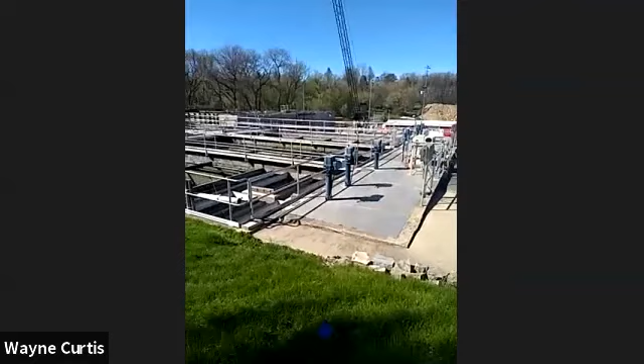What I wanted to do is, let me see, I need to make sure I know how to switch back and forth. I'm actually on site at the Penn State wastewater treatment plant. For those of you that have never been here before, I got permission today, thanks to John, I was saying Joe Swiderski. Wanted to thank them.

Note that today is Earth Day, and so I usually like to talk about global cycles. We touched a little bit on biofuels last time; really the focus there tends to be on carbon. Of course, the emphasis is not only on the fuel itself, but also on global warming as well. There are some issues that are not as popularized that have to do with other cycles, and nitrogen and phosphorus are two of them.

I do know that there's certainly a lot of you that may be motivated, or hoping, to go into saving the world through pharmaceuticals and so forth, and certainly the COVID circumstance has made that more prevalent. But one of the things people don't appreciate is the whole reason why we have the opportunity to be afraid of COVID is largely because advances in wastewater treatment have actually saved far more lives than the entire pharmaceutical industry combined.

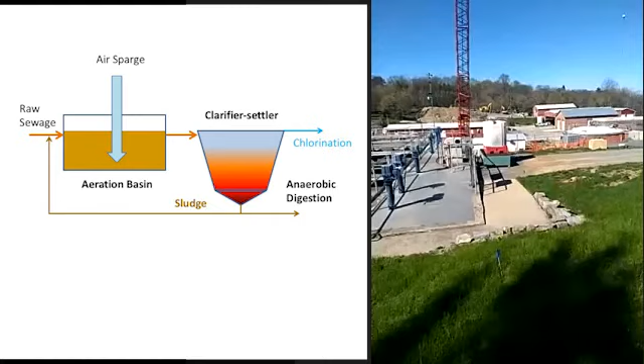So let me go ahead and switch the camera here. Let me start out by pointing out, as we head into the primary aeration basins, that this facility is designed for about 3 million gallons of water a day. Right now it's running at about 500,000. Million sounds like a lot, and it is. So the process has to be very well designed to control two different retention times. You want the solids to stay behind, and the water to run through as quick as you can and get clean.

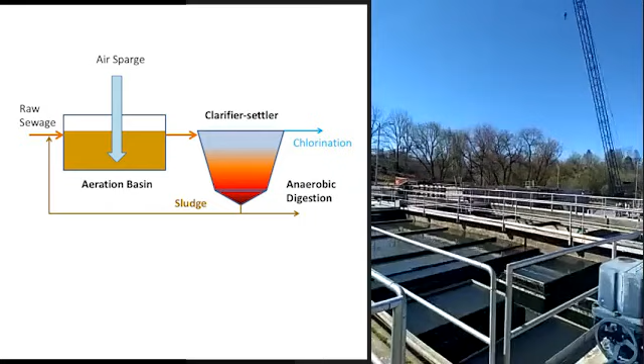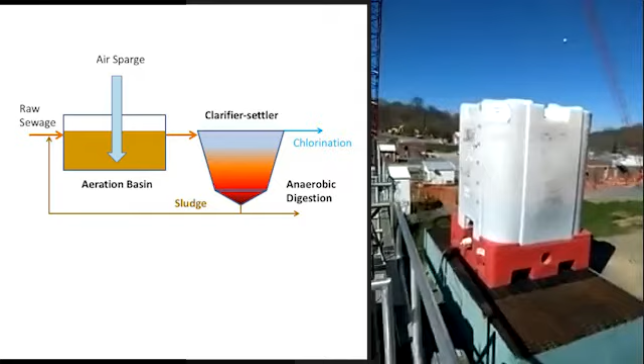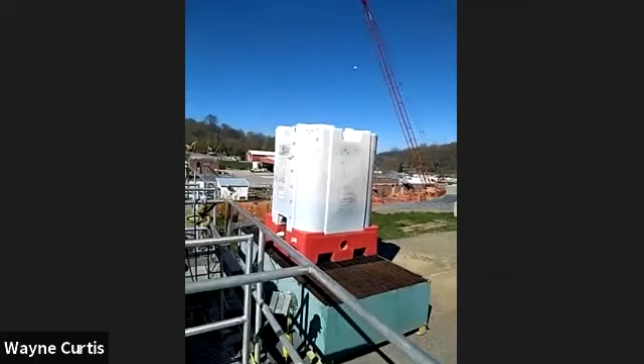Because there's not enough biological oxygen demand, or poop, they're actually feeding it. They're spending a lot of money right now buying carbon. This is called MicroC, which is basically an alcohol-based system. So they're feeding energy into this system to keep the microorganisms alive, because if you don't have the microorganisms alive, you'll lose control of the process.

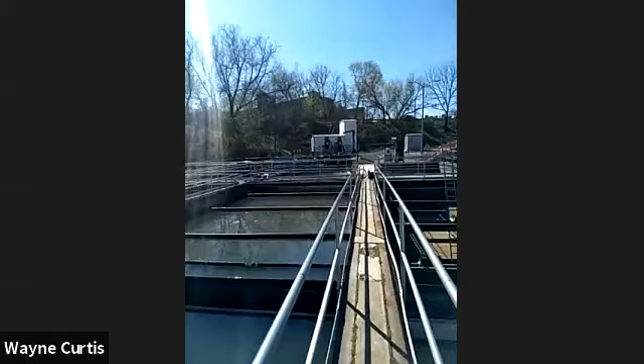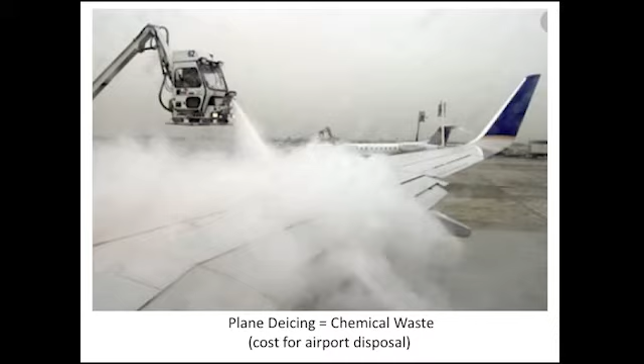Ironically, because the cost of this is now quite high, they just figured out that they could get the waste from the airport, because they use alcohol-based de-icing, and that alcohol de-icing is actually a waste product they pay to get rid of. And so now the university waste system is picking that up for free, and now they don't have to do that. And they're literally feeding it into the tank to keep the organisms alive.

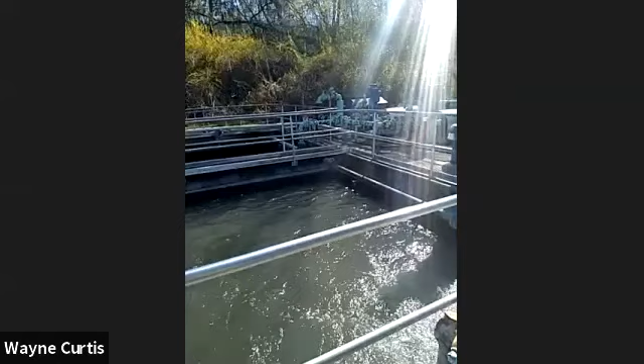Now you can imagine at the front end of a wastewater treatment plant, up there you have to get out the bits and the pieces and the grit and so forth, and that's what the filters are. And this is just a primary aeration tank. Now, because there's such a low BOD, they're holding steady, shall we say. They're minimizing the amount of feed into the system and just keeping things running, and a lot of the things aren't actually running here.

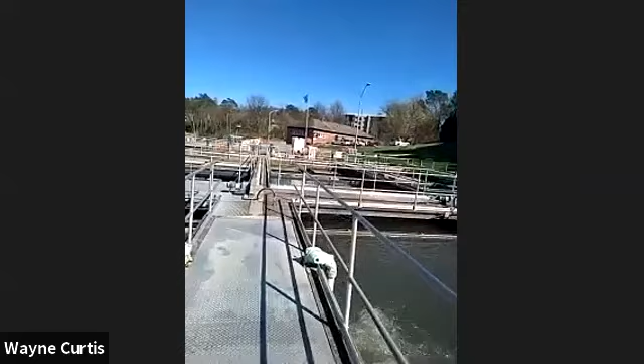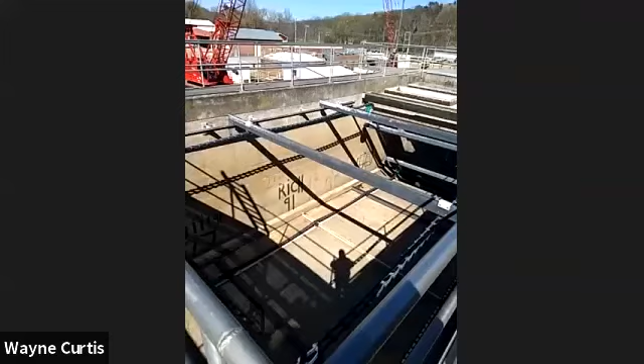When you go from this primary aeration tank, you go to a secondary one over here, which is full. It's kind of a neat opportunity here because the others are empty. And this is a settling tank. And the whole goal here is to settle things out. If you look down inside this area here, these are pretty deep, and as it settles to the bottom, you see these big chains, and they're just dragging the sludge down into the pits over here and getting the solids out of the system.

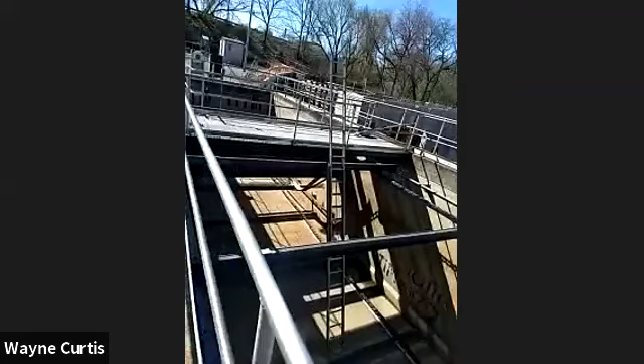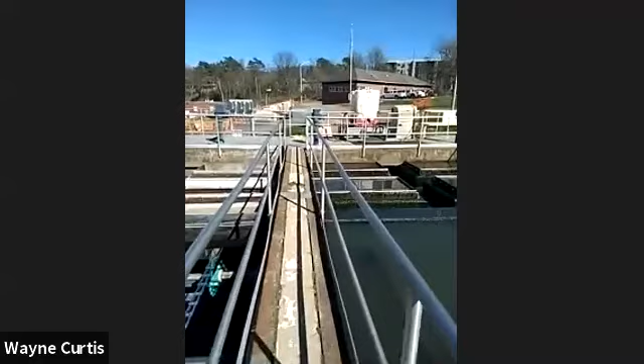So this efficient system, called the activated sludge process, was actually developed in the early 1900s, when they made the observation that by throwing a lot of aeration into a primary tank and then recirculating that, they thought they were activating the sludge, kind of like you do activated charcoal. They didn't know what the process was, and it turns out it's really facilitating very rapid growth and collection of the bacteria with a bunch of protozoa, eukaryotic critters that flocculate and stick together, and that gets them very activated for consuming the carbon and so forth that's coming into the system.

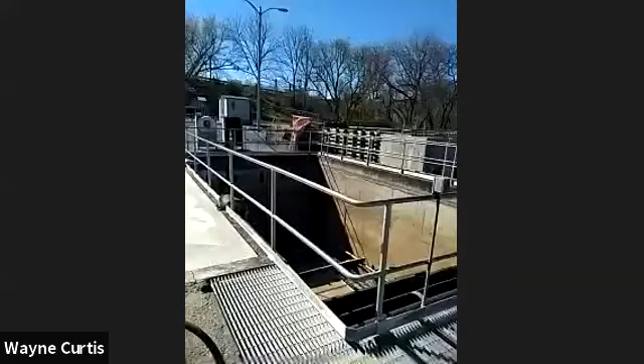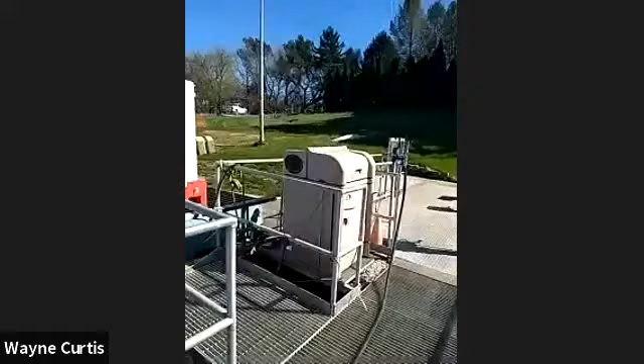And so by having a highly activated recycle, a recycle-based stream, what you end up with is organisms that are raring to go and also easily settle, because you're always trying to get the water separated from the solids.

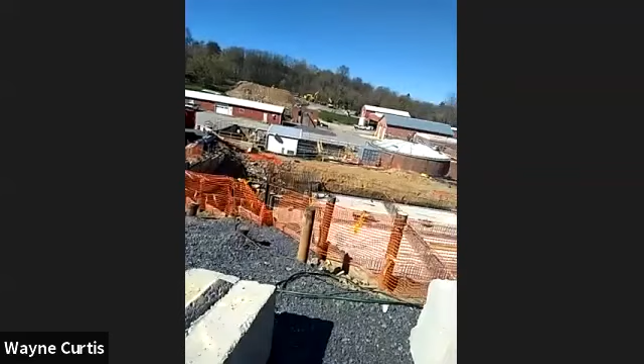So there's construction right now, because they want to make it a little more self-contained, a little less using the materials that came from the university and the surrounding community, and so they're separated now. So the university is planning to handle, shall we say, its own poop and not the community's, and that gives them a little more control, except on, say, football games.

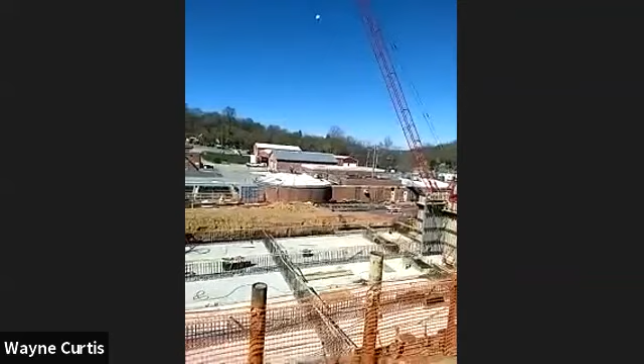So that primary tank here, now just to take a global look at what's going on, the sludge heads down to the tanks you see down here, and those are anaerobic. You see they have sealed tops on them, so those are biogas generators. Within those tanks, you take that sludge, undergoing very inefficient respiration, if you will, so that you retain a lot of the energy, and the waste product of the electrons is methane. You're basically taking the carbon, sticking 4 hydrogens on it, creating methane, and then it phase separates. And so that's an anaerobic digester.

So from here, aerobic, the process goes down to the tanks down here, where you have aeration basins, and those aeration basins are trying to oxidize everything they can. So if we now think about the big electron balance, we'll call it the world and so forth, the sun is here, and the sun has a lot of energy to shake loose electrons. We talked a lot about that, and grow plants, and that helps them to reduce carbon.

But plants have that fundamental difficulty in getting the nitrogen from the air, and that's because the enzymes associated with that are inhibited by oxygen. As a result, an awful lot of this process of biological control is based on controlling oxygen levels. We'll talk about that a little more down in the aeration tank, and then there are other tanks over there that are the anoxic tanks. But controlling the electron flow that happens in these things is all about that.

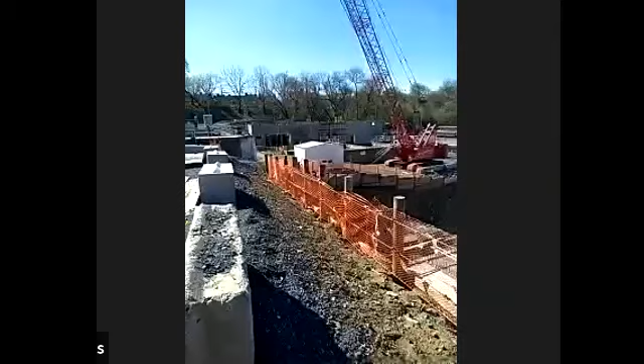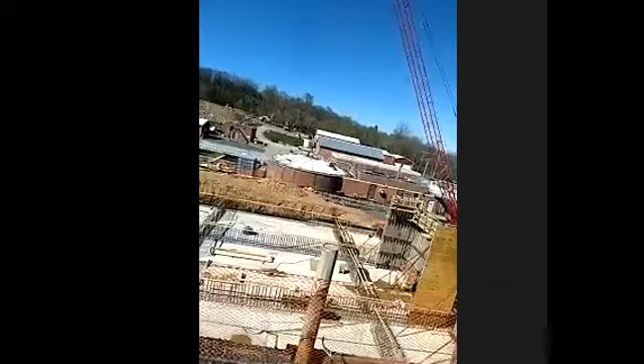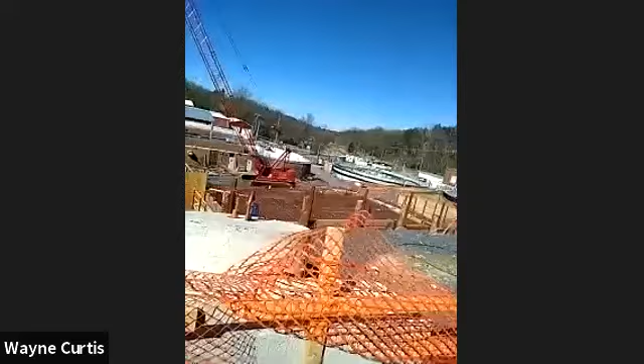This was a very complicated wastewater treatment plant, and the construction that you see here is actually new technologies they're putting in for removal of phosphorus. These will be tanks in here designed to be at a certain aeration and redox to allow for organisms to capture the phosphorus. And on the backside, over in here, is where they're going to have membrane filtration. So they're going to go to a membrane-based technology for the final purification.

Somewhat ironically, this wastewater treatment plant, unlike most, doesn't have a restriction on the effluent associated with phosphorus. The reason is that the effluent from this is actually pumped several miles up to the Toftrees area, where they spray it out onto fields, and even in wooded areas there. Since that phosphorus is basically going into a giant biological filter and not into the local streams, they don't have a restriction on the phosphorus. But nonetheless, they are developing the technology for the removal here as well.

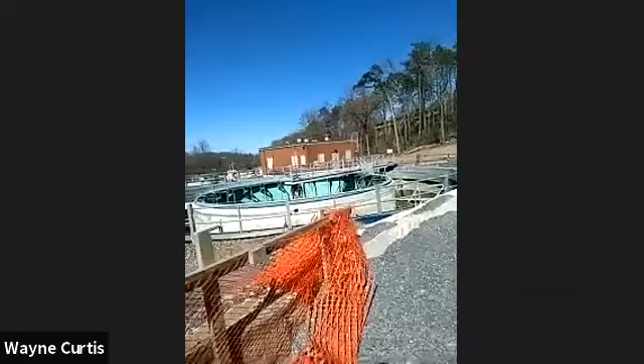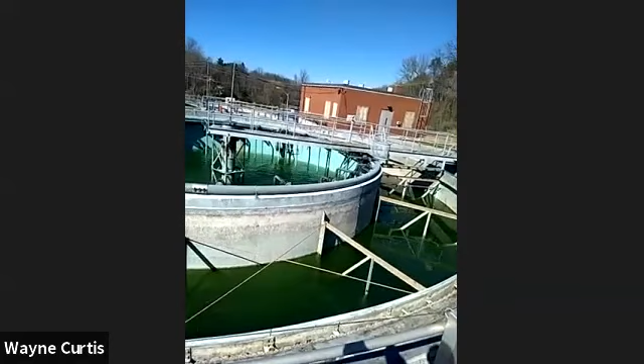Now, these basins that we're sitting here, get it out of the wind. This is actually kind of like the old school first generation of the activated sludge process. A little while ago the center tank was up and rolling, but now there's a little bit of aeration going on in there. The center is where they would actually aerate and activate the sludge. Then it would come over into the secondary area here, which is more still. If you look closely on the outside, you'll see these metal weirs, and the clarified water would spill out into this outer tray.

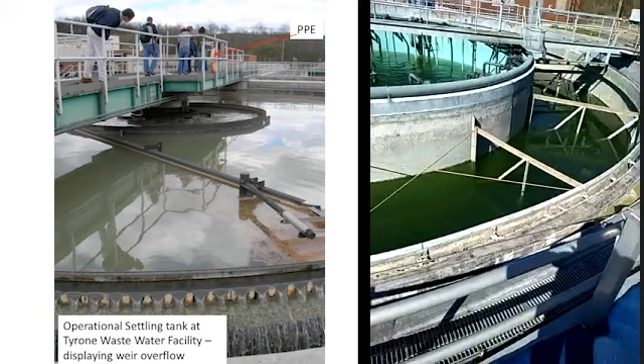So this was a self-contained activated sludge process where, for a small university or community at the time, you could have a self-contained 3-compartment aeration system with compressed air up and running going into these systems. These are all going to be demolished because they'll be replaced by the new technologies over there. A lot of the energy in a wastewater treatment plant is burned compressing air.

You have to blow a lot of air into these systems to provide the mass transfer. We've been talking about mass transfer all the time, KLA and so forth, but those mass transfer coefficients are to try to make money. Here, you're trying to get rid of waste, so you want to minimize the energy and power you put in to achieve the oxidation. The little building in front of us here is chlorination, because this self-contained area where I am right now was the original activated sludge wastewater treatment process.

As we walk down through here, we will get a closer look at the methane generation, or biogas generation, where the retention time in these is weeks. Remember, you're doing all that solid separation to get the sludge, and the excess activated sludge that's not recycled back to the aeration basins is put in here, and it digests under anaerobic conditions to produce methane.

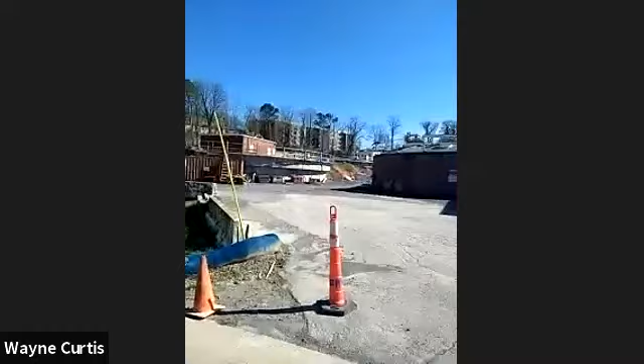Now, for a tiny facility like this, you can't generate a lot of energy. In fact, if you look back behind us, there's a flare that is sometimes burning. Since there's no students here, not enough poop coming this way, that flare is not burning right now. But for a large plant like the one in Philly, they had a dozen 10 megawatt Jenbacher generators, engines designed to convert the methane into electrical power.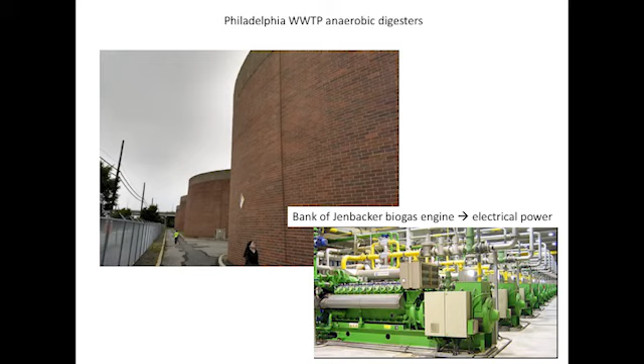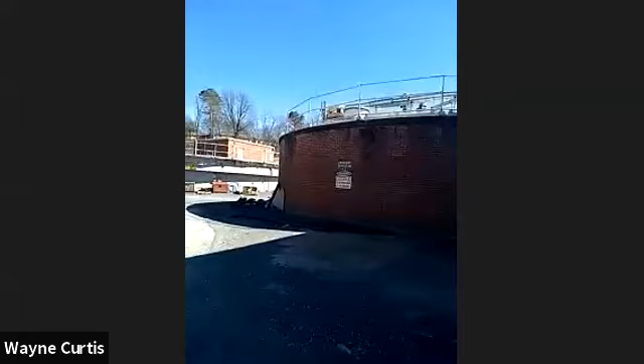So a large wastewater treatment facility will purposely try to create their own energy. And for a facility like, if you've read the chapter assigned last week, the wastewater treatment facility up in Boston, it's one of the largest in the world.

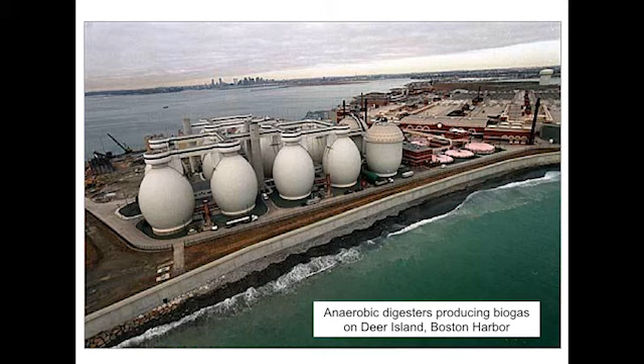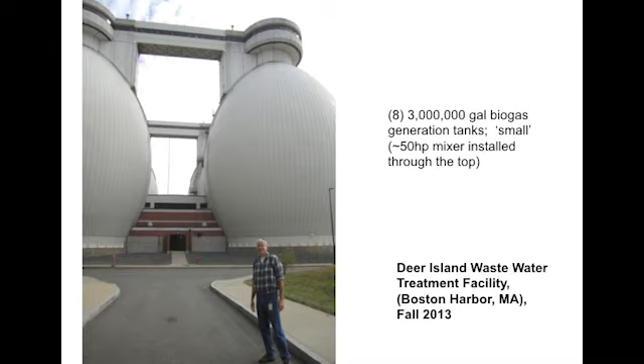That facility is running, I think it was 3 million gallon digesters like this. Even then, they still don't have net energy production, but they were working on a project to allow food waste to be purposely...

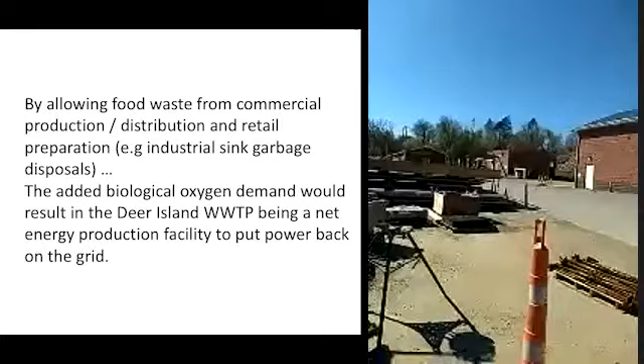Now, what's inside this building, it's not open at the moment, but what used to be here was a project that I worked on with Jack McWhirter. He's a big supporter of our department, actually. Made his money in student housing here. And we did a project here on autothermal digestion.

Now, what's inside here now is a press. Think about having two bands of really strong cloth between rollers, and the rollers then kind of impinge on each other, so you put all the stuff in there, and it squeezes out the water, and then that material is normally dewatered enough that you would then send it to the landfill.

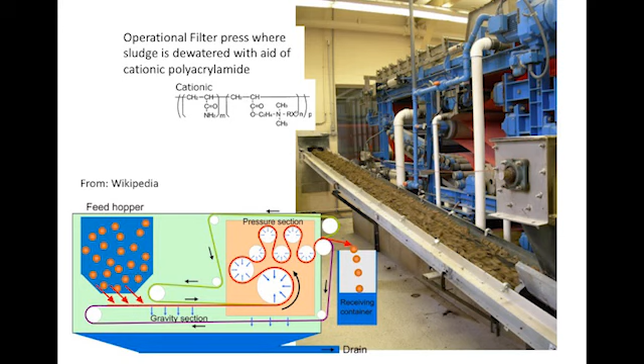One of the other big costs of wastewater treatment is because of this issue of working with... let's see, we'll get you back here.

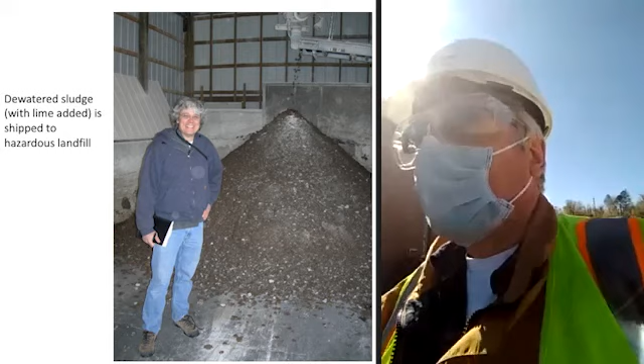Because you're working with human waste, you have to be concerned all the time about the human pathogens. So that material actually goes to a hazardous landfill. In fact, this material from this area in central PA was going the whole way down near Philadelphia. There are not that many hazardous landfills, and that's quite expensive.

The alternative was to try to use the energy in the biomass. Remember that poop's got a lot of energy in it. Would it be possible to use that energy to generate enough thermal energy to bring it up to pasteurization? Remember that sterilization requires you to boil a lot of water and get hot for a long period of time. Pasteurization only requires you to get to about 65 degrees Celsius.

And if you can hold it there for 3 hours, that's called pasteurization. It's considered to no longer have human pathogens that can live in there. So I can take the sludge from the anaerobic digester, where we're trying to extract a lot of the electrons into methane, and then we take it over to the filter press over here.

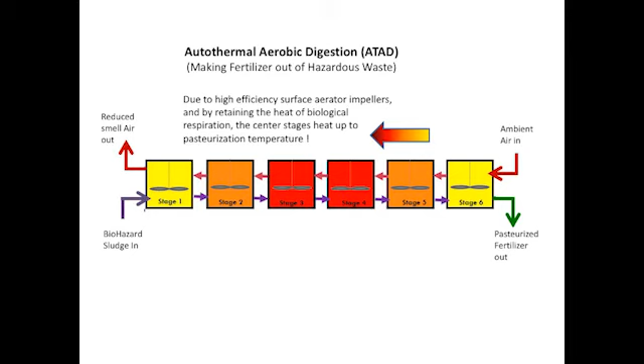At that point, with the energy that's still in it, if you could actually heat it up, it becomes fertilizer. And in fact, that process called autothermal aerobic digestion is being used commercially in some places, even Tacoma. It's so successful, the amount of fertilizer they're producing, that they are getting other wastewater treatment plants to send them their poop because they're actually making money on fertilizer.

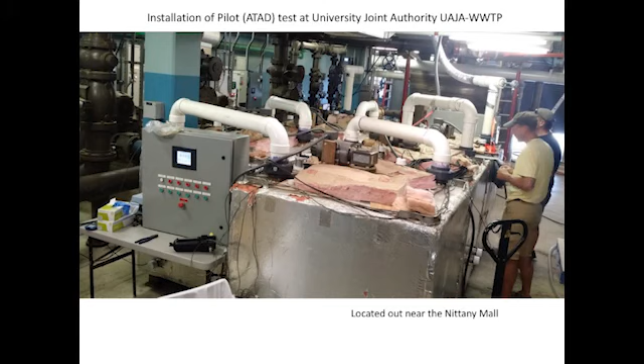But where I wanted to go down to here is the aeration tank. This is where the primary oxidation of materials takes place, so you can think of this as the big bioreactor. Now, one thing you'll notice here is that we don't, in this particular one, have mechanical agitation.

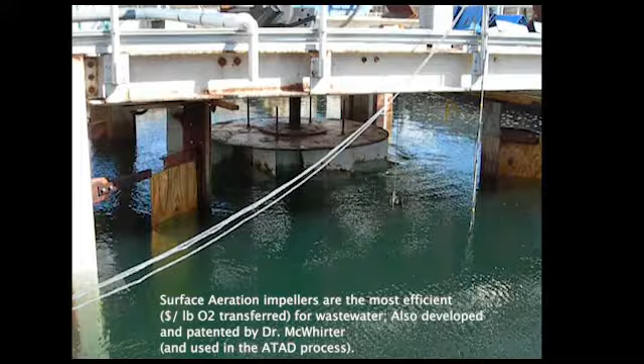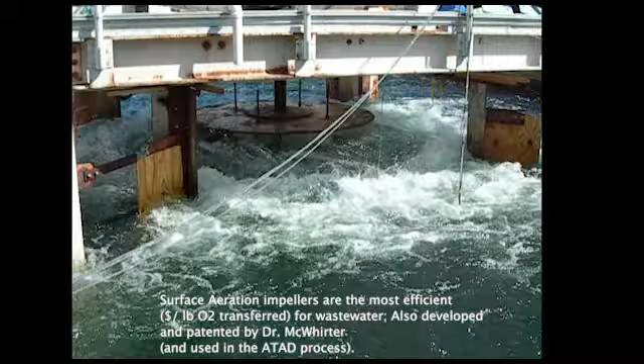I've actually done validation tests for impeller-based surface aerators, and I'll put together some pictures for this lecture, that are designed to be in million-gallon tanks. And so this is all about oxidation, getting the oxygen in as much as you can.

And if you take a look here, okay, let's see, I don't want to drop my phone. I hope you're seeing that and not me.

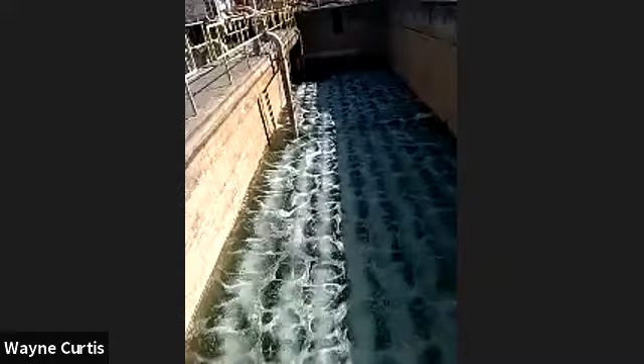What's under here are spargers, okay? And this is the same as the one next to it here. These tanks here actually have polymer spargers because they don't need to be using sintered metal like your mammalian cell culture things. And in fact, because they're made out of plastic, they don't want them to be exposed to the sun.

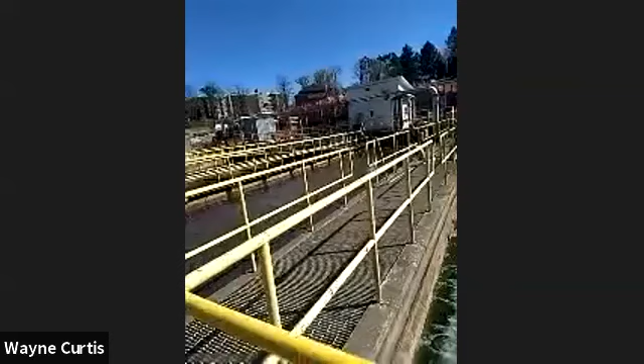And so the whole reason that they have these submerged, and a lot of things submerged in here, is they don't want degradation of the plastic due to the solar energy, since they're normally underneath. Well, the other thing is that you want to think about this as a biological reactor system, because there's so little bio load right now provided by the university due to the shutdown.

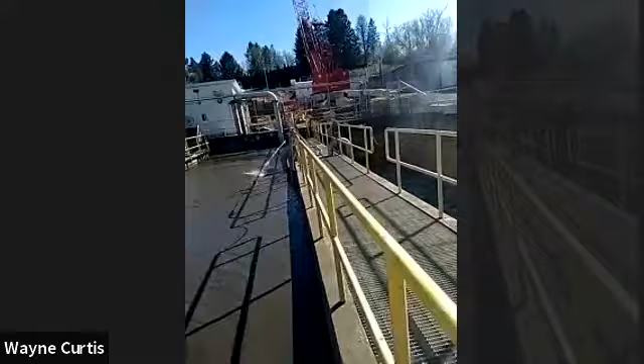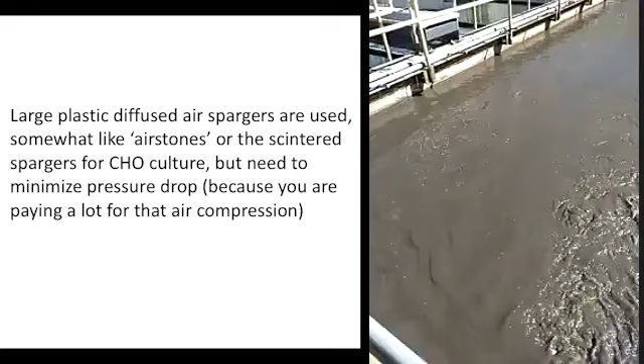So look at that, the solids. You can see how it's aggregated and it would sediment. That's because it's activated sludge. But they were

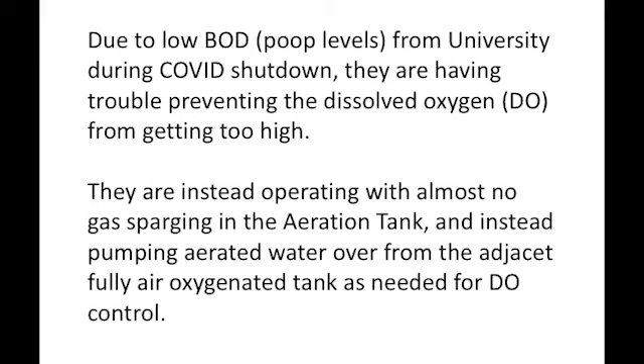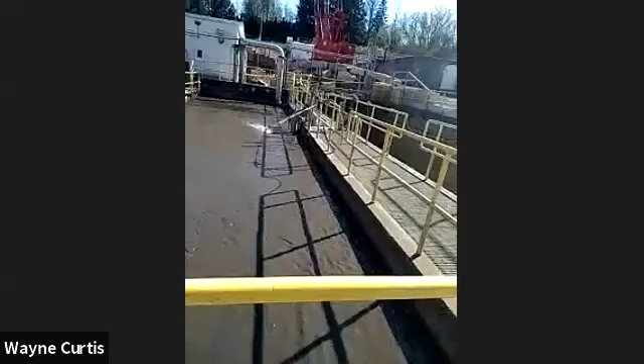Okay, so that's the basis of the control of aeration. Now, there's one more really important thing that I wanted to do, because this isn't really Earth Day until you think about the global nitrogen cycle, which to me is probably one of the most horrifying aspects of the energy use of our current unsustainable society, and that is to remember that the nitrogen that's coming to this facility is coming to us from the Haber process.

So we're burning large amounts of methane in air to get enough electrons. And now we don't want this nitrogen to end up in Chesapeake Bay, and so we have to get rid of it. And one of the ways that you can prevent the nitrogen from being in the water is to turn it back into N2 gas.

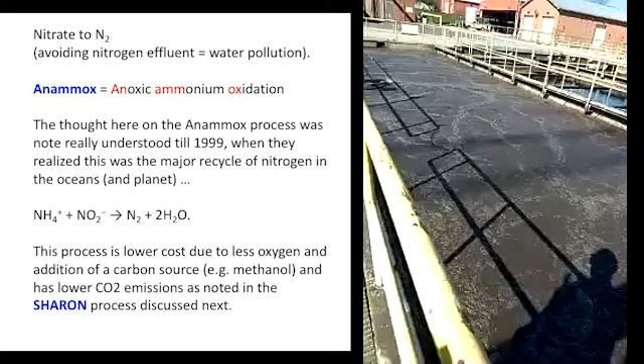The anammox process, you can see it's kicking up. The dissolved oxygen must have gone low in this system. And so right now, instead of just simply drawing the oxygen from the tank here, they've actually turned on the spargers in this basin. And now you can see just how much gas holdup. You'll see the whole level of the liquid has increased, and we're dramatically increasing the oxygen transfer rates inside this process for oxidation.

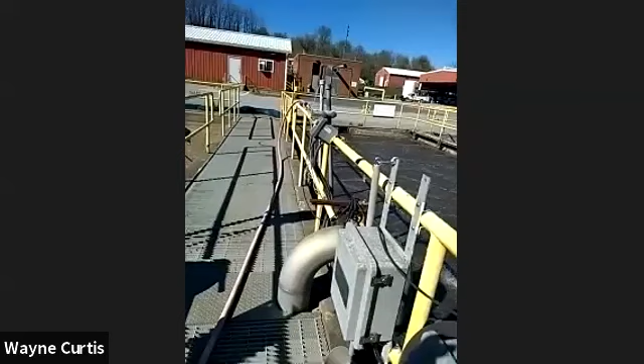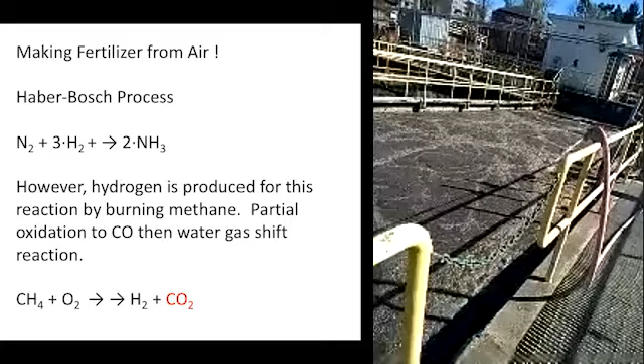Now, getting back to what I was saying, think about the energy balance of human consumption and agriculture. We take N2 gas from air, we burn methane, create a lot of carbon dioxide, and then we take that material, make fertilizer out of it to grow things, and then we add more energy into it in order to turn it back to N2 gas so it doesn't end up in our streams. And so we're paying for this multiple times.

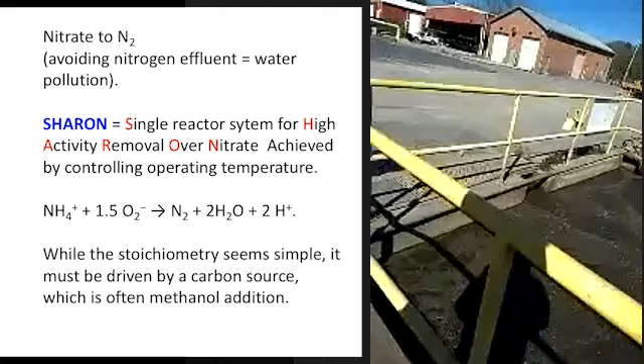In fact, there's a process that one of the students had worked on installing for the Hudson near New York City, where they bring in tanker cars from trains every day of methanol to dump into the final stages of the wastewater process so that they can use the energy of the methanol to turn the nitrogen compounds, the fertilizer, back into N2 gas, so that we can burn more methane to turn it back into fertilizer. So the concept of trying to circumvent that is if we could use the energy to autothermally pasteurize that, instead we could recycle it.

And then the last concept that I want to leave you with here today is the big picture of agriculture. You can see they've really kicked this thing on. The big chunks must be coming up off the bottom. And so, think of this very simply: how much of the nitrogen that we make for fertilizer ends up in a wastewater treatment plant like this?

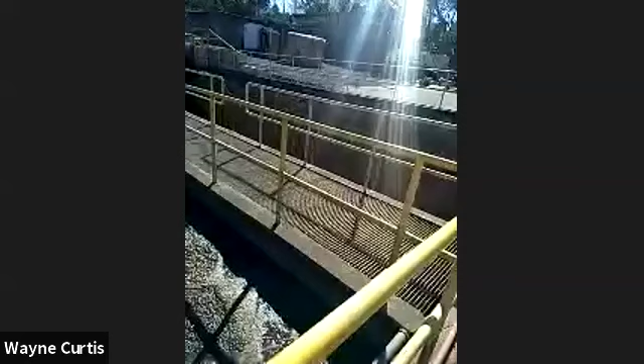But the reality is that an awful lot of our fertilizer goes into crops in the field, and then there's runoff. And so an awful lot of the nitrogen balance doesn't come here, because in a concentrated environment like a wastewater treatment plant, we have the ability to develop these technologies that prevent this from going out and being pollution. But if you think about a diffuse thing like a farm, that's not the case.

And in fact, when you produce milk, for example, the manure is collected. Sometimes you get a little bit of anaerobic digestion like this, but usually not. Instead, they throw it out in their field.

Okay, I think I've covered most of what I had intended to here. I did have some notes. Let me see. I covered the autothermal digestion, the hazardous waste, the phosphorus, like I had mentioned before.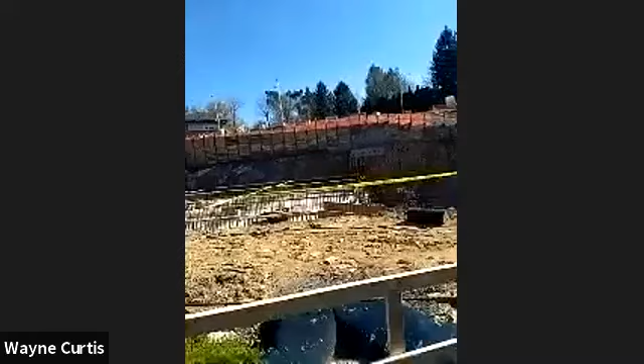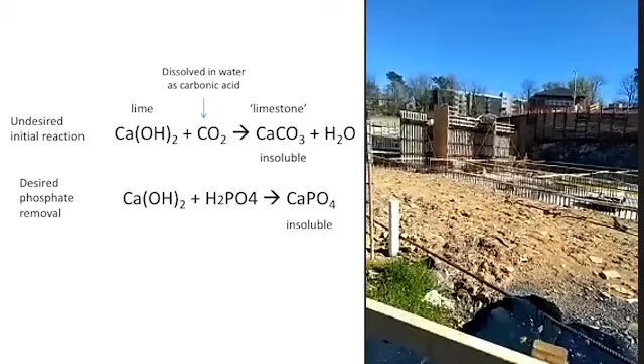You would actually add in chemicals like calcium lime. Lime is calcium hydroxide, and then that lime would have to react a lot with the carbon that was in the system before it could even get to the phosphorus. And so you'd make a bunch of limestone, calcium carbonate, and you'd also make a lot of the phosphate, calcium phosphate, and you would have large quantities of precipitates in there. And those precipitates would end up in your sludge and anaerobic digester and going to hazardous landfill.

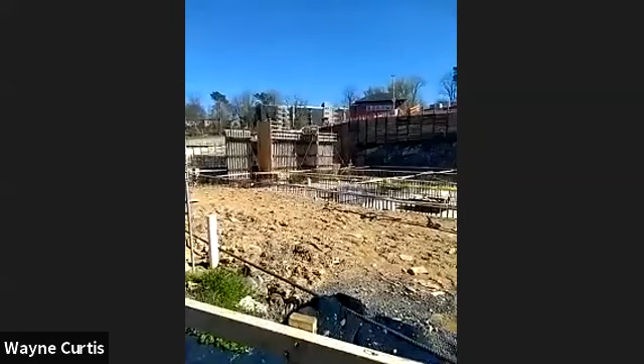Okay, so there's iron-based, there's a lot of different things out there, but they were all based on precipitation. And the problem with precipitation as a technology is that you're basically throwing away the phosphorus, okay? Whereas this system that's being built here is biological: you grow the conditions of an organism that stores polyphosphates. There are organisms that will suck up phosphorus as much as they can. They use a lot of energy to do that. And they make polyphosphates. You've heard of polyphosphates like ATP, right? Triphosphate. When you link together phosphorus, it has a lot of energy in it.

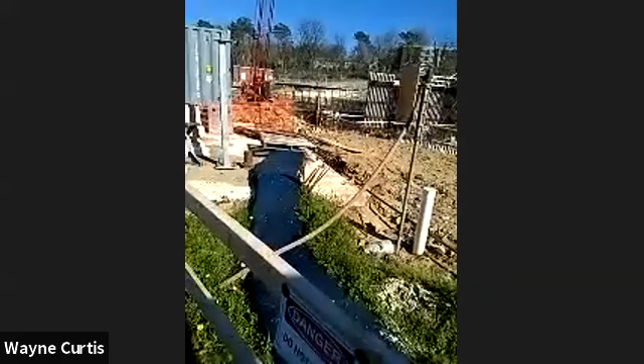And so if you manage to come up with a means to concentrate it in a biological way, there would be a way to then recycle the phosphates as opposed to simply landfilling them. And as I mentioned, this entire technology is going to be different, where downstream, the final polish in this system is going to be based on microfiltration. And the filtration will then remove the materials. Okay, I'm going to switch back. These are obviously clarification tanks over here. Does anyone have any questions?

This might be a little off, but what happens to hazardous waste material? Does it just stay in bins? Yeah, that's a good question. A hazardous landfill, it's hard to get that certification. It has to be in the right geological location where we're hoping for the next 1,000 years that stuff doesn't leak out of it. It's not like a typical landfill. A typical landfill where a lot of biological material goes, that's where you get gas generation. If you've heard of landfill natural gas, it's because we put so much biological material, a lot of which is diapers, but we won't go there. You then generate methane, and you can recover the methane from that.

Hazardous landfills have special hauling, special permits you need, and the idea is that it has a clay liner in the bottom so that water doesn't leak out. When you fill up, it stays there forever, which never happens. Other questions?

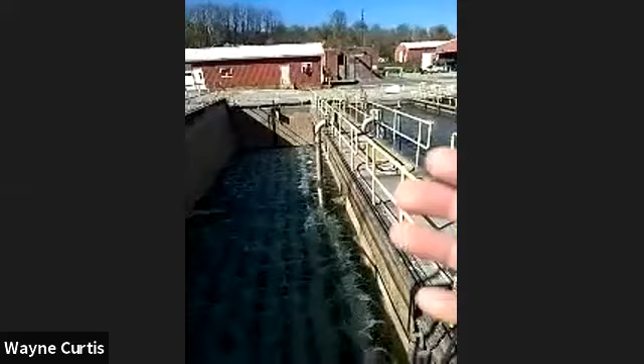Okay, so these two basins are the same. This basin is the same as the one that's full. What we have down there is a bunch of spargers. This is an aerobic process, and a huge amount of compressed air is being blown into this tank through polymeric spargers, just because they're reasonably cheap. One of the reasons why they still have them covered with water and running is that the polymer will degrade in sunlight. So even though they're not full, they're keeping water on them to protect them from the sun, so you don't get degradation of the plastic down there.

Now, the other thing which I didn't mention, which I will now that you asked about polymers, is that over in the filter house, one of the characteristics you can imagine: if you try to filter something and it's not the right particle size, if it is small, it clogs filters, right?

And what happens then is it clogs up and then you can't get the water through it anymore. And so industrially, what you do when you want to filter something with small particles in it is you add a flocculant that'll actually allow water to run through the mesh. And that's done with a cationic polyacrylamide, actually, for a lot of this type of things.

For anyone that's in the molecular biology world, polyacrylamide's used a lot for gels, but this is a different one; it's also called China Flock, which is a trade name. What it does is you add this in to the material, and then two things happen. Since it's a cationic polymer, it will actually absorb on that, because most biological cell walls and things like that are negatively charged. And so that cationic material will actually absorb onto that and make it fluffy.

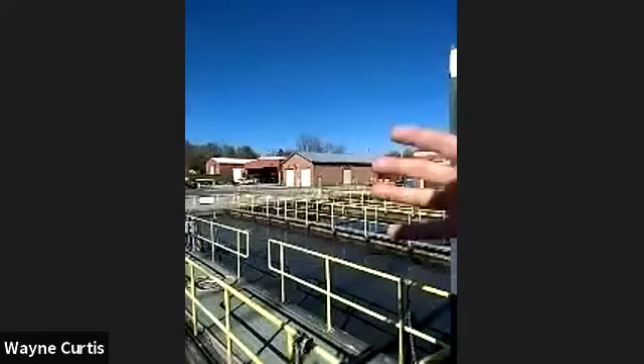And then when I go to filter it, because it's now fluffy, it prevents it from blocking the filter, and the water will actually run through it. So probably in that building right over there, you see the truck and so forth, and you see big bins and stuff. A lot of that is likely to be cationic polyacrylamides that are used in the filter presses here on the final stage.

So once you've sucked all the electrons you can out of here, where you first do it with aerobic, then you do it with anaerobic, and then the leftover sludge from there goes to the filter presses, okay? That is where you have a very small volume. Even for a facility this size, it is actually hard to find a filter press small enough to process 5 million gallons of wastewater. That's how efficient filter presses are. And literally you'd be sending a couple trucks a week out to the hazardous landfill.

There is a process where you do oxygen injection, for those who want to make a connection to KLA, that if you take that sludge and instead of doing anaerobic digestion, you can actually put oxygen into it. We're not talking air, because if you put air in there, there's too much nitrogen and it strips off the thermal energy. If I actually do countercurrent processing, I can get enough heat that the process will get to a temperature that will pasteurize the material as well. And so those processes are actually done.

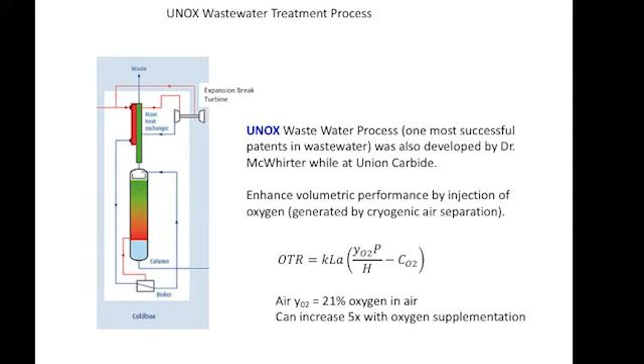Mass transfer is dependent on the driving force, and you have 21% oxygen in air. If you inject oxygen in there, your mole fraction of oxygen goes up by 5 times, from 20%. And so you can get extremely high mass transfer rates that actually make the wastewater treatment process so much more efficient that it's actually cheaper to separate the air by cryogenics and inject oxygen into the system to do that.

But they're not big enough. And so since they weren't big enough, what the UNOX wastewater treatment process did is that for the existing cement in the ground, you could basically process 5 times more, so that as communities continued to grow, they didn't have to build more wastewater treatment facilities. They could use the ones they had and use the enhanced mass transfer of oxygen injection to allow them to use existing facilities without huge capital investment.

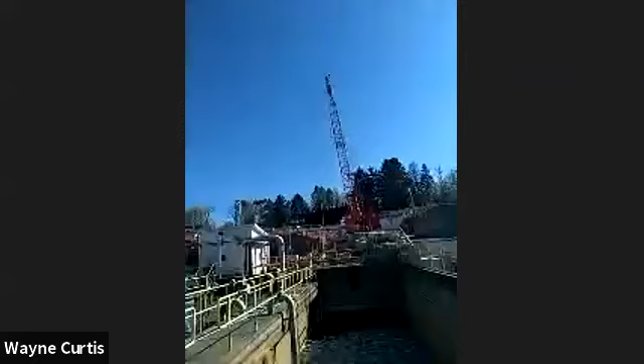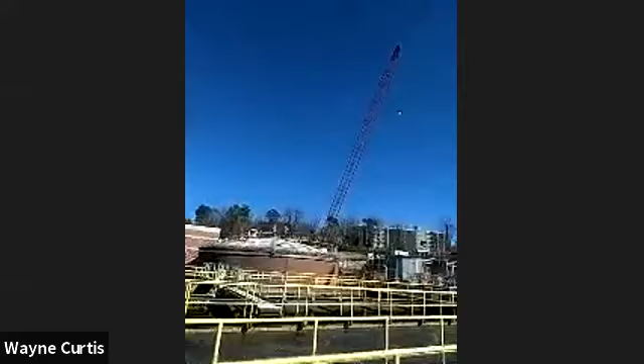I don't know how much money they are putting into this wastewater treatment plant, but it's going to come back fully operational. They just got the permits to do that actually next week. And he told me that there were 65 people from the companies on site doing this renovation, if you will, to the university's facility. And that'll be back up and running next week, or the construction will be.

Any other questions? Very, shall we say, appropriate location for thinking about the nitrogen balance of the planet.

And I just want to remind everybody, this is Earth Day. You should do something. I've already started to turn my garden. And I'm going to go back now and make sure I get my onions in. They're way late this year, but, you know, do something nice to the earth today, please.